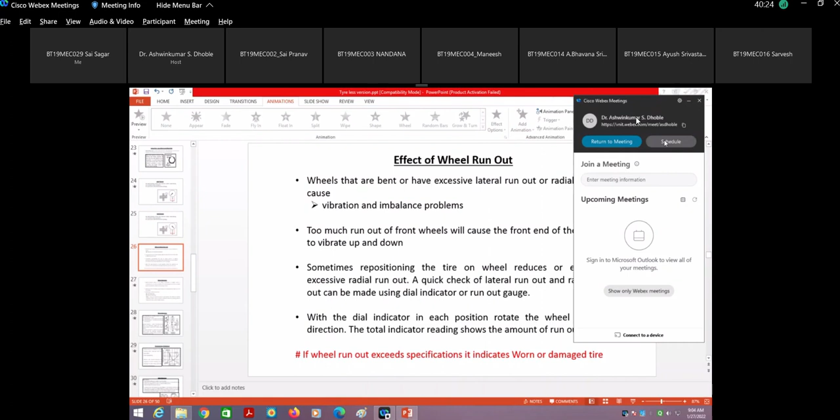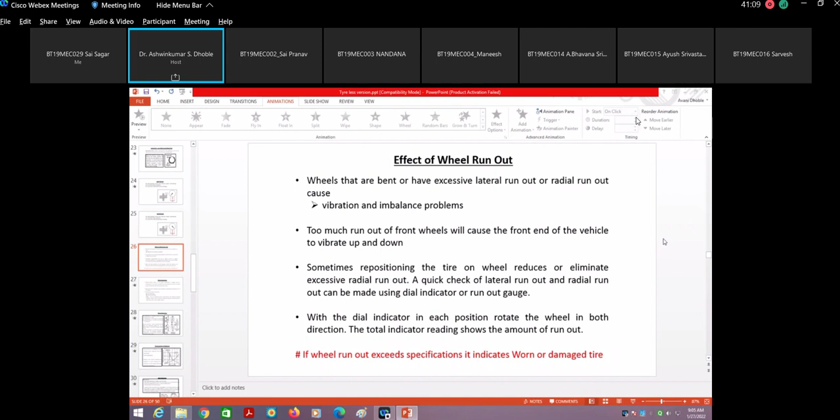So in the last class, we were discussing about the wheel runout. Are you able to hear me? Yes, let's move ahead. Now we have seen the radial runout and the axial runout. After this, we'll proceed further.

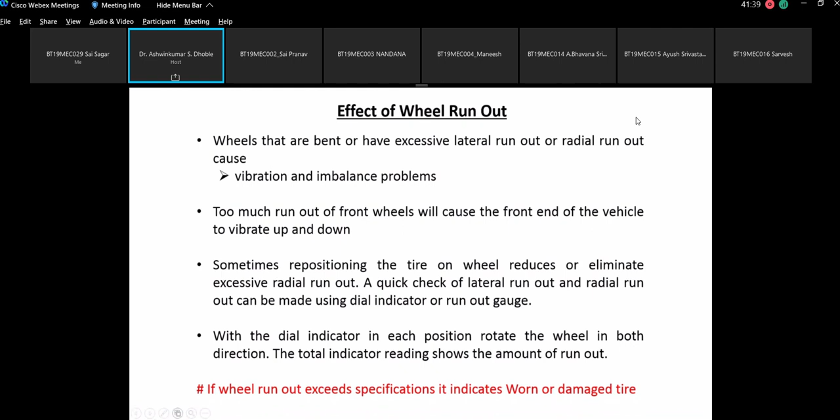Now here comes the wheel balancing. So what do you mean by wheel balancing? What will happen if you do not balance the wheel? Sir, what do you mean by wheel balancing?

Yes, sir, please answer if you can hear me. Have you studied the balancing, the dynamic balancing? Okay, dynamic force will come on the wheel axle. Sir, how will it come? Dynamic balancing of the wheel. Sir, what do you mean by balancing? Why are you saying the specific word dynamic balancing? Centrifugal force. So, centrifugal force is what?

Sir, what are the different types of balancing you have studied during your theory of machines class? Please answer, sir. What are the different types of balancing you have studied in the theory of machines class? Saurabh? Yes, sir, can you please answer? Yes, sir, we have studied about reciprocating, static, and dynamic balancing, sir.

Rushikesh Kolhade, why are you joining late? Rushikesh, please answer. You are joining the class late by 9 minutes.

Okay, read this: wheel balance refers to the proper distribution of weight around a revolving tire and wheel assembly. Poor wheel balance can have a marked impact on both the vehicle and passenger safety. Please note that it refers to the proper distribution of weight. That is basically, if the distribution of weight is not proper, then you will have a problem as far as the revolving of the tire assembly is concerned- proper distribution of weight. Poor wheel balance can have a marked impact on both vehicle and passenger safety, because there is a problem. If the wheel is not in balanced condition, then there will be some imbalance created, and if this imbalance is beyond the control of the driver, meaning he is not able to steer the vehicle, then there is going to be a problem as far as balancing is concerned.

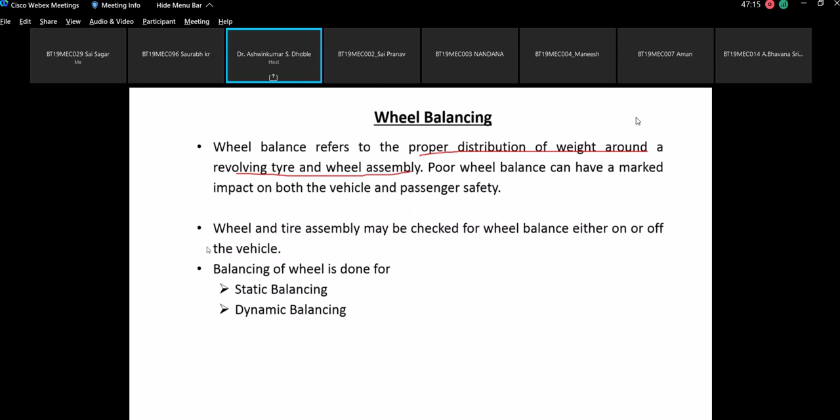So please understand this. Now, wheel and tire assembly may be checked for wheel balance, either on or off the vehicle. Balancing of wheel is done for static balancing and dynamic balancing.

So there are basically two types of balancing which have to be done for the vehicle. One is static balancing and the other is dynamic balancing. Let us see what we mean by static balancing and what we mean by dynamic balancing.

A tire and wheel may be in static balance and still have dynamic unbalance. So there is a marked difference between static balance and dynamic balancing. Either static or dynamic imbalance will cause the steering wheel to shake from side to side at higher speed.

That means if there is some imbalance on any of the wheels, then that impact gets transferred to the steering system, and there will be side to side movement of the steering wheel at higher speeds.

So you might have seen that if there is some wheel unbalance, or some problem with the wheel alignment, that causes problems with the steering of the vehicle. If the steering is not proper, there is directional instability, and once you disturb the directional stability of the vehicle, you know what is going to happen. So wheel balancing is a very important thing.

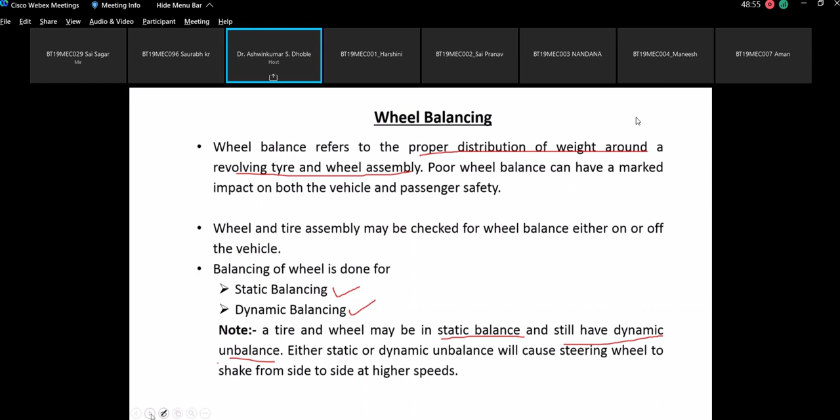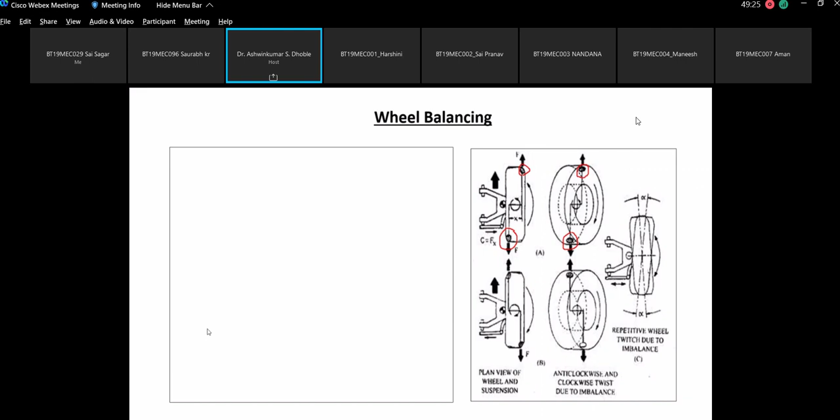So then this kind of movement occurs, a repetitive twitch due to imbalance. We are going to see what exactly this means. So sir, let us look at this now.

The balancing of rotating masses can be considered in two stages. One is static balance, that is, in one plane of revolution. Static balance is the technique of balancing the wheel in only one plane. But if you have unbalance in two planes...

In this particular sketch, if this is the center line, so this unbalanced mass is falling on one plane, and this one is falling on the other plane. If such kind of imbalance exists in the wheel, then it is going to create a couple.

This couple will be created as the wheel is rotated. Here the rotation is shown. Because of this, there will be a force acting through this mass in one plane and this mass in the other plane. So an unbalanced couple will be produced on the wheel, and the wheel will have side to side movement.

That is why it is termed the second stage, more than one plane of revolution. Then it is basically dynamic unbalance.

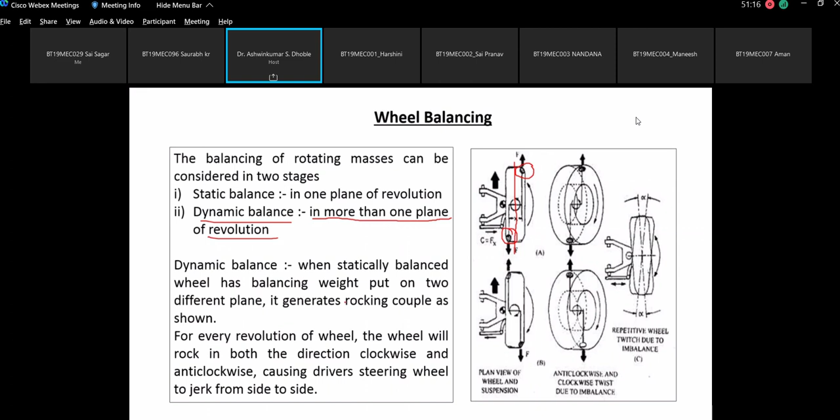Now, dynamic balance - when a statically balanced wheel has balancing weight put on two different planes, it generates a rocking couple as shown. For every revolution of a wheel, the wheel will rock in both directions, clockwise and anti-clockwise, causing the driver's steering wheel to jerk from side to side. So this is the effect of unbalance if it is there.

Now the characteristics of unbalance - here a graph is shown, wherein you will find that as you increase the wheel speed, the dynamic... this has to be static unbalance.

So dynamic unbalance will increase and then die out. But this is not correct - this is not dynamic unbalance. This is basically the unbalance caused by static unbalance. It will increase to some value and then die down because of the dynamic unbalance, whereas because of static unbalance, the amplitude of oscillation will go on increasing.

So this graph gives you the idea of what is going to happen with the increase in wheel speed - that means if the wheel RPM is increasing. So we'll see here what it says.

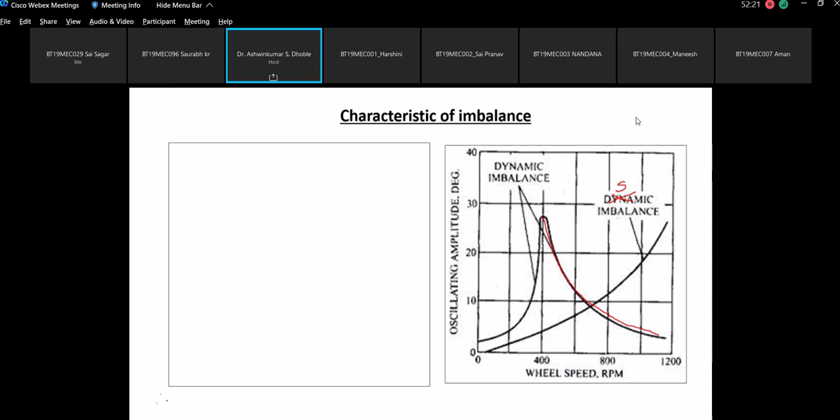Steady increase of amplitude, wheel twitching about swivel pin with a rising wheel speed. So please note that this is the steady increase. So that is due to static unbalancing. So you need to balance the wheel in the static condition.

That is one thing. Then, whereas with the dynamic unbalance, the magnitude of the wheel twitching rises to maximum and then declines with further increase in the wheel speed. That means this is going to rise up to a certain point and after that it is going to decrease. So this is the effect of the dynamic imbalance.

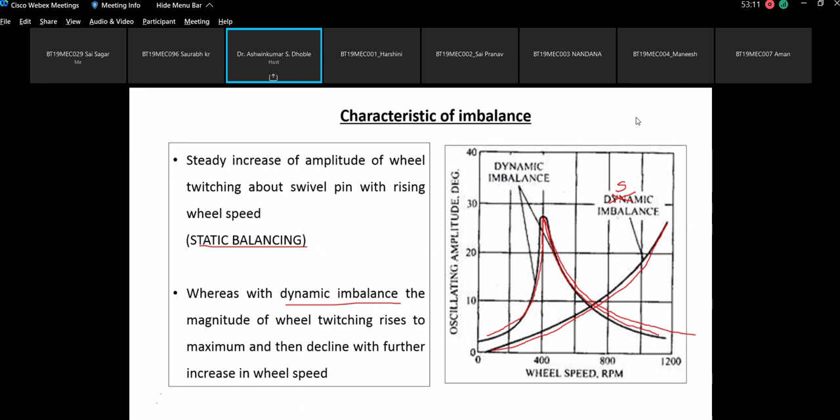But please note that if you have the static unbalance, then the oscillation amplitude is going to increase as you increase the wheel speed. So this is the effect. Okay. Now static unbalance. Exactly what is static unbalance? So static unbalance is, this is equal distribution of weight around the wheel.

That means you need to take out the wheel and put it on the floor, or you can say a pointer where you can have the wheel suspended at the center point, and then you try to add the balancing weight in such a way that the spirit level which you kept on the wheel should become perfect. The bubble should come perfectly at the center.

The wheel with static unbalance rotates with bouncing action or tramp wheel. Tramp is a hopping up and down of a wheel at higher speed. Okay, this will eventually cause uneven tire wear.

Okay, now what it says next is a wheel can be statically balanced by using a bubble or static balancer. So there is specific balancing equipment which is available with the tire selling dealer. So you can balance the tire there: remove the wheel from the vehicle and mount it on the bubble balancer.

As I have told you previously, there is a bubble balancer which is used for balancing of the wheel. If the wheel is heavier in one section, that is unbalanced, the bubble in the center of the balancer will move off center.

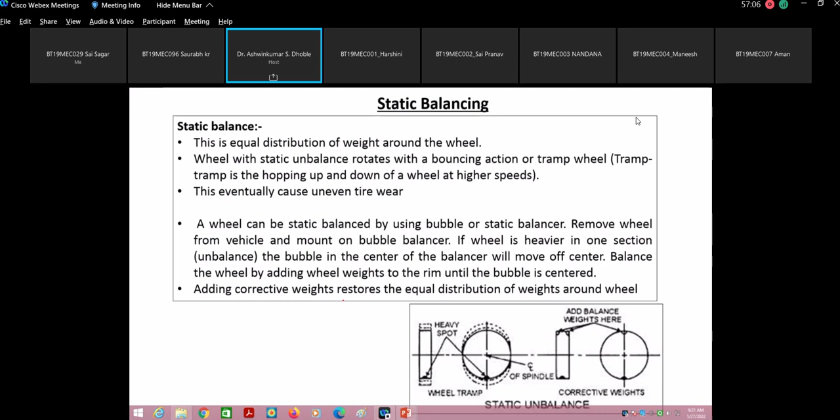So when you balance the wheel statically, the summation of the total force in static condition is equal to zero, but that doesn't guarantee it, because whenever you rotate the wheel there can be an imbalanced couple produced by putting the weight in two different planes. So even if the wheel is statically balanced, you have to do dynamic balancing. That is a must as far as balancing of the wheel is concerned. So have you understood static balancing? Is there any issue as far as static balancing is concerned?

Static balancing is balancing of centrifugal force in single plane. Somebody has quoted it previously, but I don't agree; it is not the balancing of the centrifugal force. See, centrifugal force will come into picture whenever there is a rotation of the wheel. If there is no rotation of the wheel, there will not be the presence of the centrifugal force. So please be careful when you select the word.

Okay, it is basically the equal distribution of weight about the point of, you can say, support. That is basically the static balancing. So please understand this very carefully. Okay, so just don't make any loose comment. Have you understood this? Do you have any issue as far as the static balancing of the wheel is concerned? Why you need to have the static balancing even if the wheel is dynamically balanced?

Because there is no guarantee that even if you dynamically balance, the wheel will be statically balanced, because it may not ensure the equal distribution of weight of the wheel around the point of rotation. Okay, so please understand that you have to have the wheel statically balanced, and you have to have the wheel dynamically balanced. Any one of the balancing is not sufficient as far as the vehicle wheel is concerned. Okay.

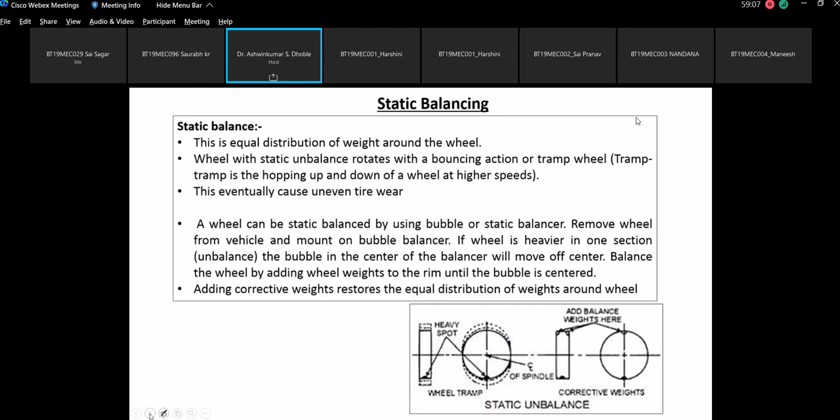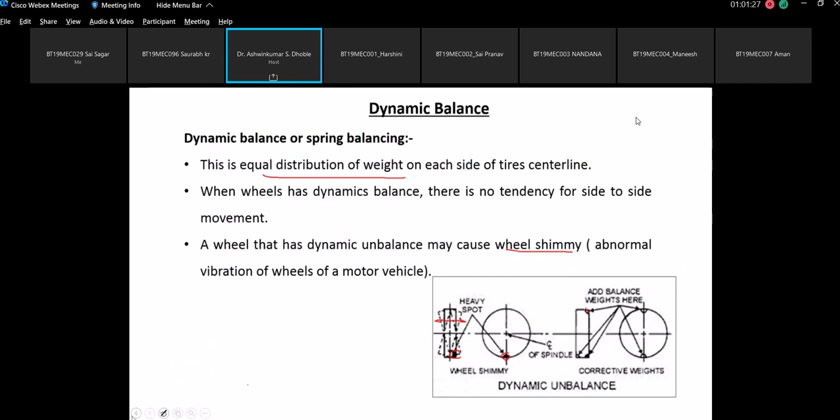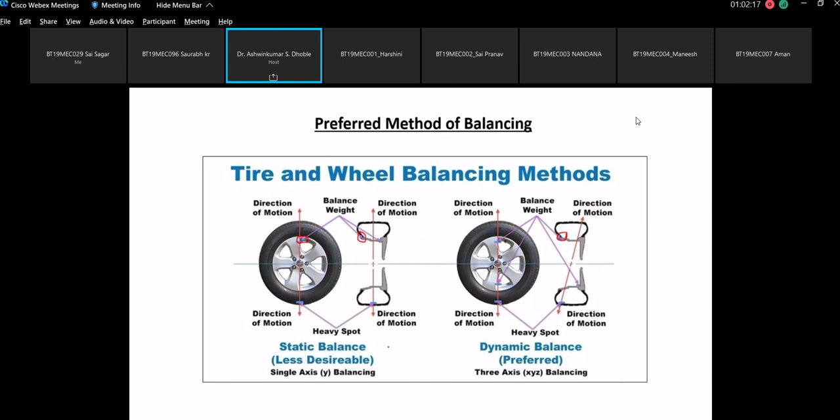Dynamic balance preferred: 3-axis XYZ balancing. This is single axis, that means you balance it in only one plane. So rather than looking at this, we will see the questions. The amount of unbalanced mass: more the unbalanced mass, more will be the wheel imbalance. That is the first thing. Second, distance of unbalanced mass from the center: more the distance, more will be wheel imbalance. This is very natural because it is m r omega square, so the value of the centrifugal force will be maximum.

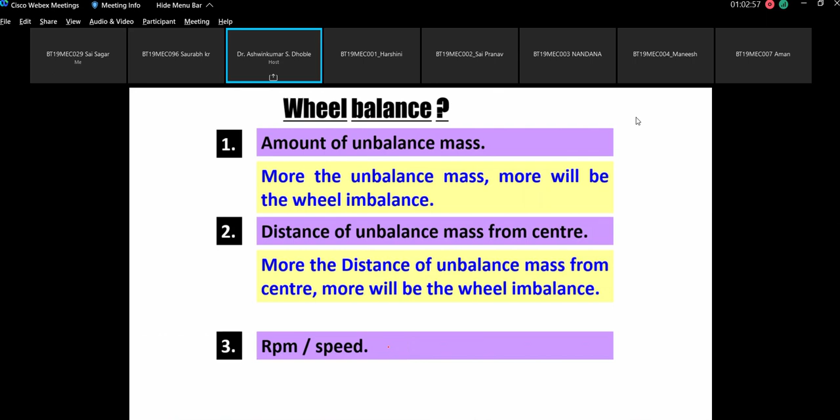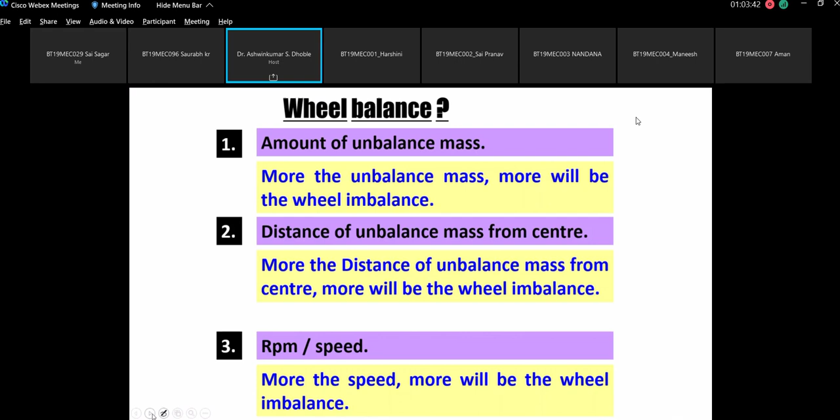Then the third one is the RPM or speed. More the speed, more will be the wheel unbalance. So these are the three things. First, if the amount of unbalanced mass is more, wheel unbalance will be more. If the distance of the unbalanced mass from the center of rotation is more, it is going to give more imbalance because it is m r omega square. If speed is more, omega is more, so the unbalance is going to increase as a square. So be careful whenever you have to balance the wheel. Have you seen by any chance how the balancing is done?

The first sign that the wheels may be out of balance is when the steering wheel starts to wobble. Wobble is the motion of the steering wheel moving up and down in an oscillatory fashion above a certain speed. So if you are driving the vehicle and you feel such a thing, understand that there might be some problem with the wheel balancing. Because of the vibration of the steering wheel, the driver will get fatigued very early compared to driving a balanced vehicle.

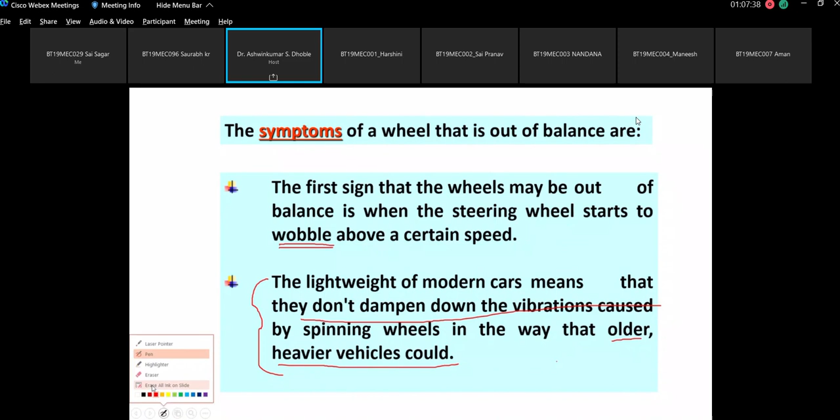The frequency of vibration omega equals the square root of k by m, where k is stiffness and m is the mass. If mass is less, omega will be more, the frequency of vibration will be more, and the fatigue will be more, because all these vibrations are transferred to the driver through the steering wheel. So please note that in lightweight vehicles the damping is not as much as in heavy vehicles.

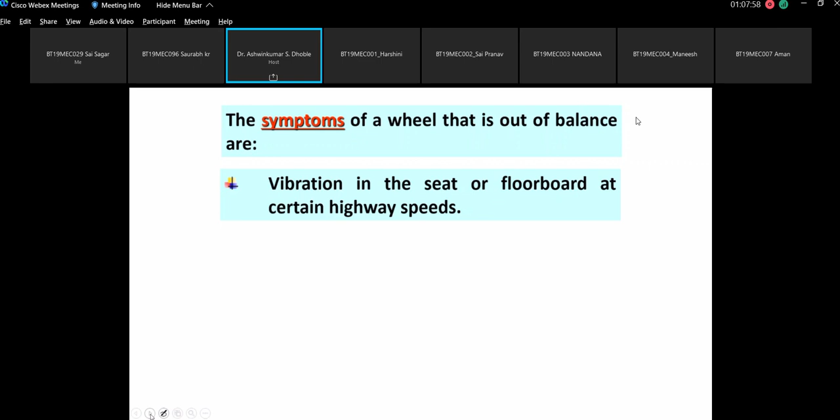There are other symptoms of a wheel that is out of balance as well. One, vibration in the seat or the floorboard at certain highway speeds, so passengers in a vehicle with unbalance may feel the vibrations. Scalloped or cupped wear pattern of the tire, which we are going to see in a few minutes, so we'll discuss it there. Then premature wearing of the suspension, steering components and rotating parts.

So one imbalance can create so many problems in the vehicle, and please note that these problems are gradual, and at some point of time they may crop up, and you may have a sudden failure of the vehicle, a sudden failure of the suspension system.

So if you are sensitive, a person who has good observation ability, then he can notice it if he is getting a seat in any vehicle. So please understand that after learning all these things, whenever you hire a taxi, there will be fear in your mind that there are so many problems with a taxi you hire from the online site.

So you will have some kind of fear in your mind: कि भाई इसका steering तो ठीक है ना, इसका wheel तो ठीक है ना, कभी sudden failure तो नहीं हो सकता, because there are some cases where there is a sudden failure of the steering linkage or steering universal joint, and as a result the driver has lost control of the vehicle.

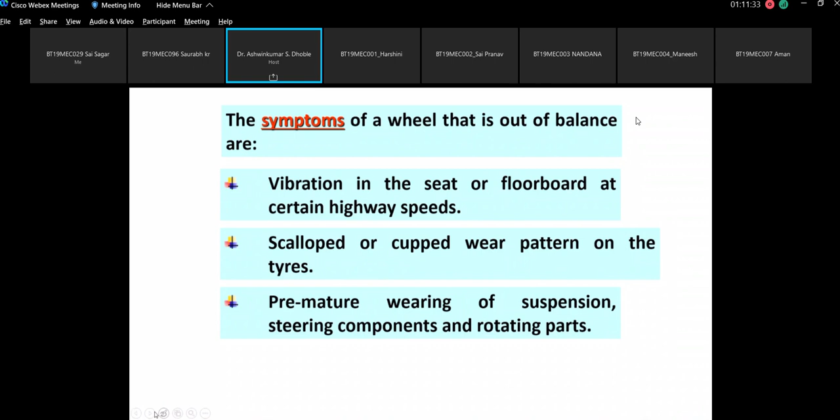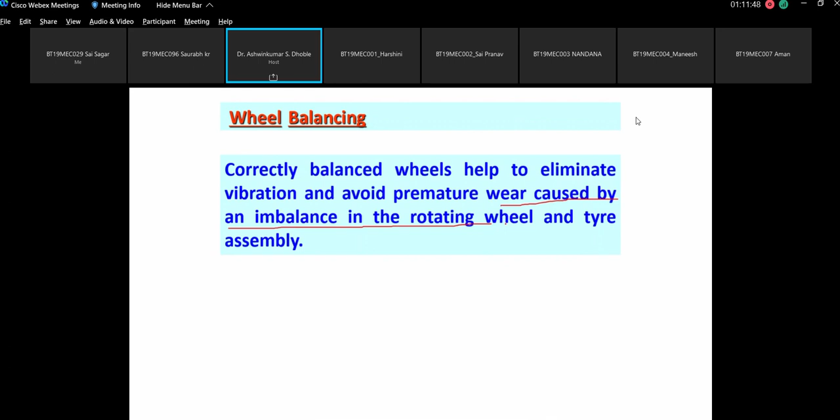केयरफुल रहो. Okay, now wheel balancing. Correct balance will help to eliminate vibration and avoid premature wear caused by an imbalance in the rotating wheel and tire assembly. This we have seen. Now wheels are balanced on a wheel balancing machine.

The machine rotates the tire and wheel assembly and automatically calculates the weight and location of the balance counterweight. आपको कुछ भी नहीं करना है बैलेंसिंग में, it is done automatically because it is fitted with sensors. You just have to take out the wheel, put it on the wheel balancing machine, and it will rotate the wheel at different speeds and give you the calculation automatically. The program will automatically calculate the location and the fitment of the balance weight.

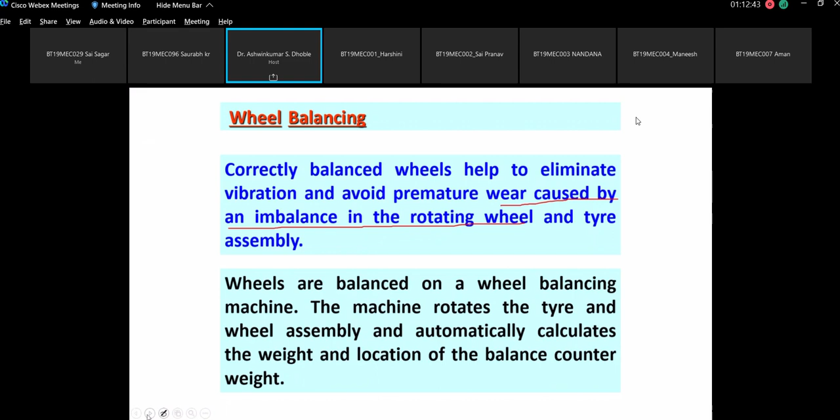Okay, wheels are balanced using small weights called balance weights that smooth out weight distribution and stop the vibration. Please note that 1 gram of balance weight will cost you around 1 rupee. Okay, so if you require a balancing weight of 50 grams, then the cost will be 50 rupees. That is the cost of the balancing weight. It comes in the form of metal tubes, metal capsules.

Okay, so next time whenever you see any vehicle, try to find out if there are some metal tablets which are attached to the wheel rim, then only you will come to know where it is fitted. I will show you the photograph as well, don't worry.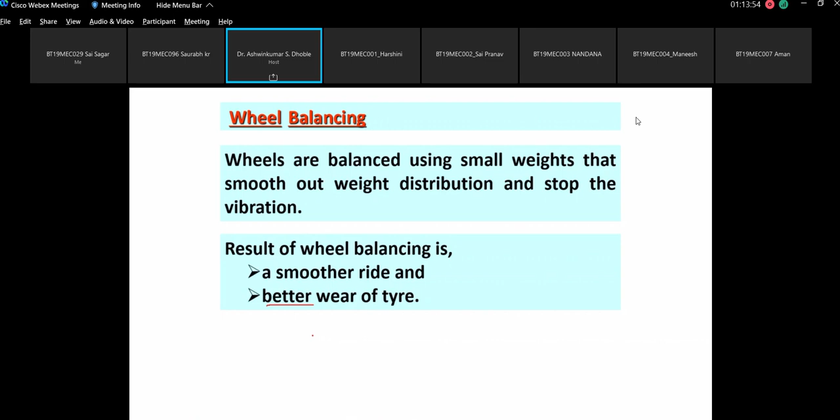Now, the result of balancing is a smoother ride and better tire wear. Better tire wear means the tire wear will not be uneven, or you can say random. The tire wear will be uniform and it will be a natural wear, occurring due to the road surface and the tire surface, but there will not be different types of wear pattern. Okay, so this is the importance of balancing.

Now, a driver may not always sense imbalance at the steering wheel. It could be present but dampened by vehicle weight. This is why balancing is equally important for both front and rear wheels. So this is the key statement.

That's why I was telling you from the start, if you are a sensitive driver, then and then only you will be in a position to feel and understand if there is imbalance of the wheel. If you are not, then sometimes the vibrations may not reach you, but there may be some imbalance prevailing in the vehicle tire. So it is important for both front and rear wheels to get them balanced.

So whenever you do the tire rotation, the person in the workshop will always try to see that all the wheels are balanced, and if some balancing weight is required due to wear and tear of the tire, he will correct it by putting the appropriate balancing weight on the tire. Okay, it's not that once you balance the wheel it will never become unbalanced. There are chances that the wheel may become unbalanced if you run the vehicle for certain kilometers.

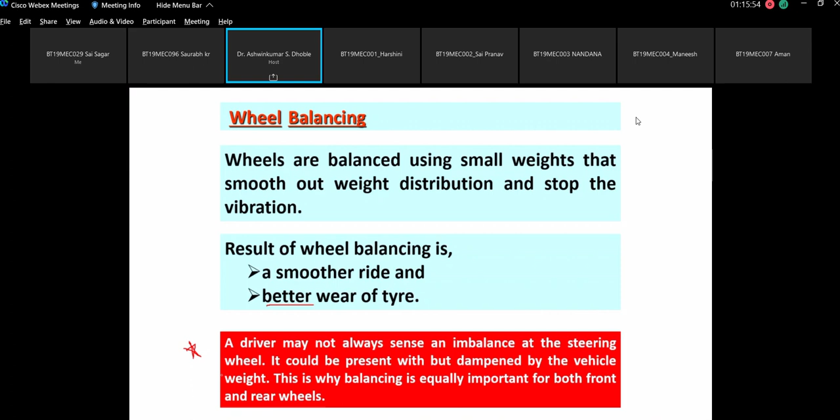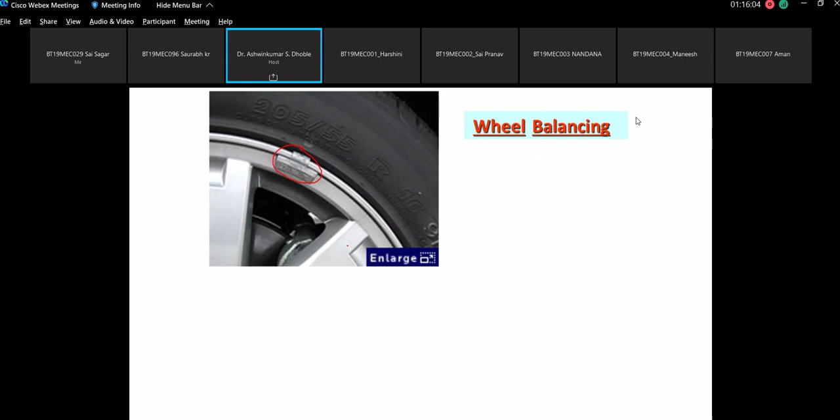Okay. Now we will see the tire wear. What are the different types of tire wear? Before that, I have a question to ask you, and let us see your perception. So please listen to the question carefully. During the summer days, the temperature in a city like Nagpur goes to 47 to 48 degrees maximum. Would you recommend that the tire inflation pressure should be less?

That is one thing. And second, during the winter, when the temperature goes down, do you recommend inflating the tire more than the specified pressure? So what is your answer for summer days? Like during summer days, the oil companies say please do not fill the tank till the last point; leave some space for the fuel vapors to accumulate. On similar lines, what is your opinion: during summer days, will you decrease the tire inflation pressure?

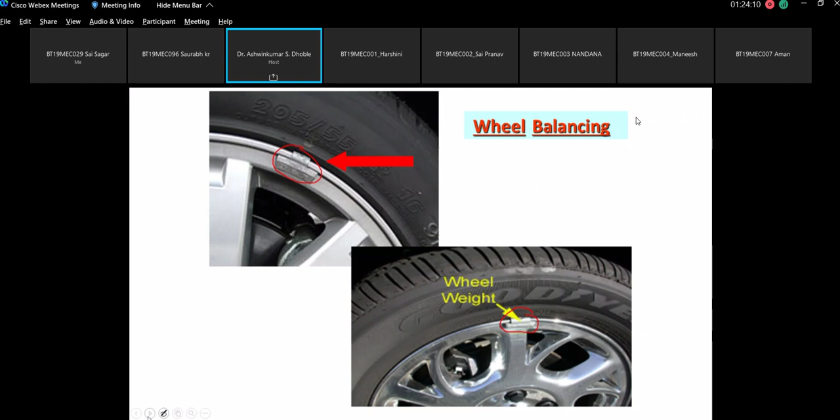The only thing they recommend is that during hot weather, please do not try to fill up the tank to the extreme end of the fuel tank. Even if you feel nothing will happen, there is a vent provided to the petrol tank lid, through which fuel vapor will escape. They do this because they want to save the evaporation of the vapors. So sir, don't do this kind of thing.

Now let us discuss tire wear. Now it is going to show you the tire wear pattern as far as overinflated tire is concerned.

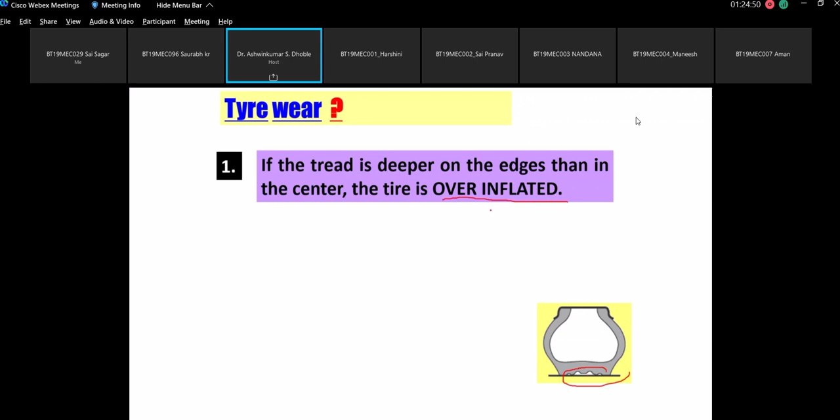If the tire tread is deeper on the edges than in the center, the tire is overinflated. That means if you see the tire where such kind of pattern is there, deeper at the edges compared to the center, then it is the sign of an overinflated tire. Deeper means the tread wear here is more deep compared to the tread wear here, so this shows that it is an overinflated tire.

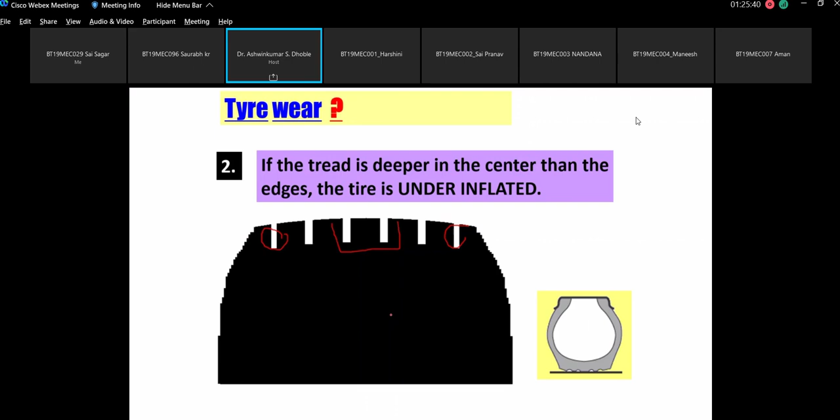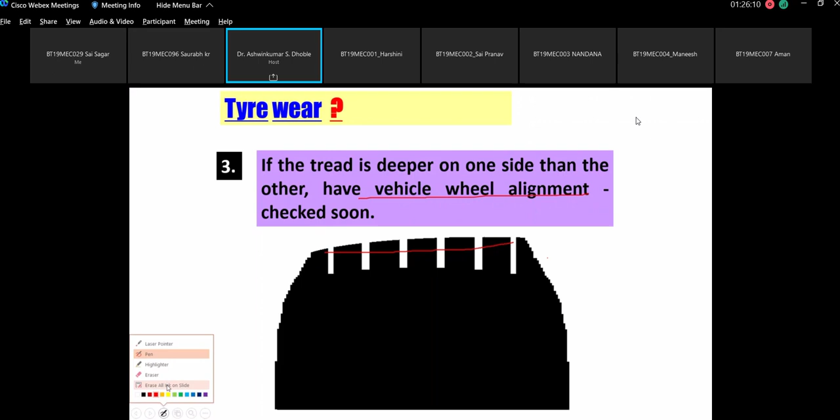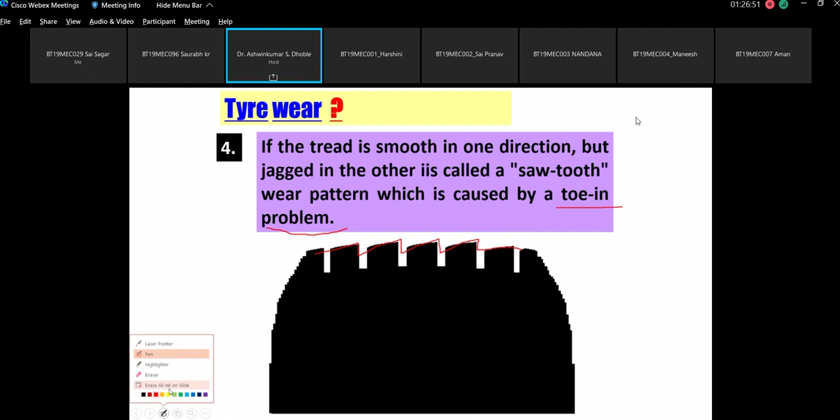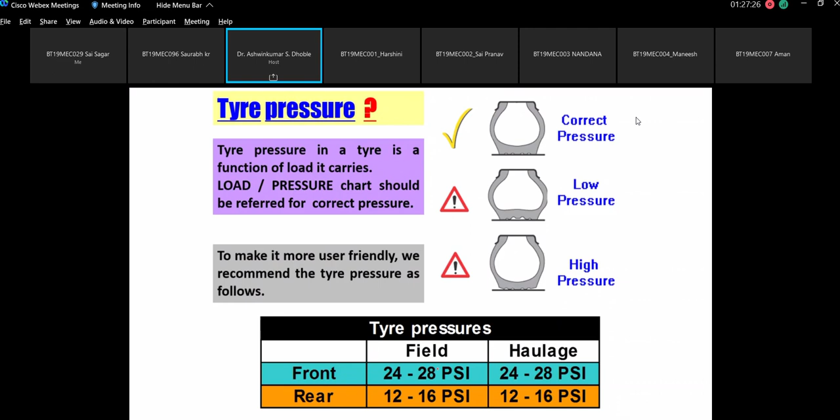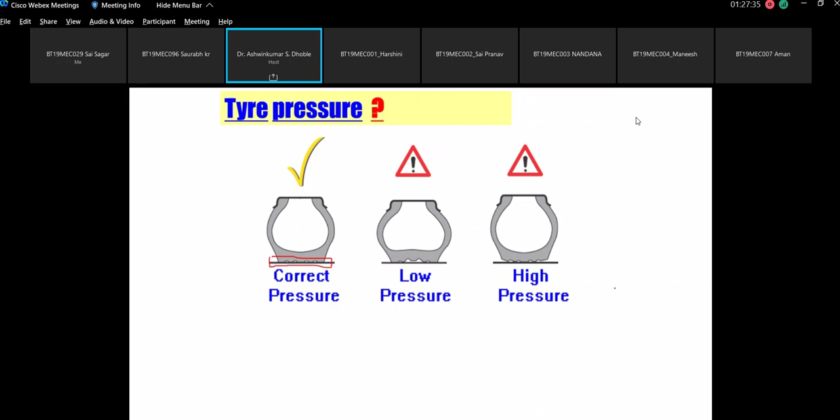So the correct pressure will have such kind of profile, that means it will touch the road properly, then there's low pressure and high pressure profile. These are basically the tire inflation values.

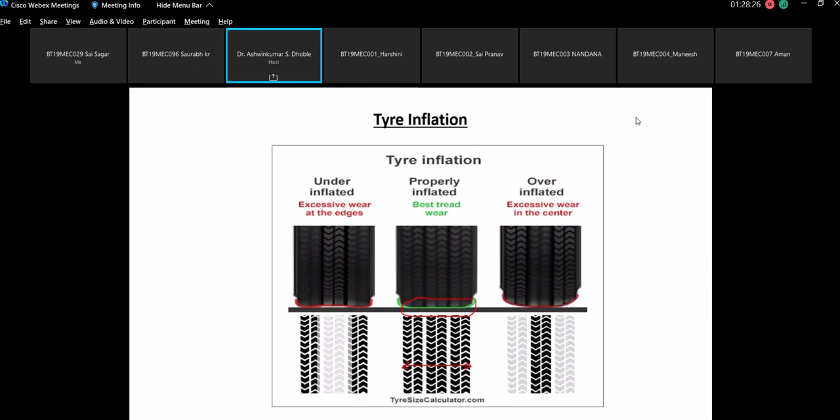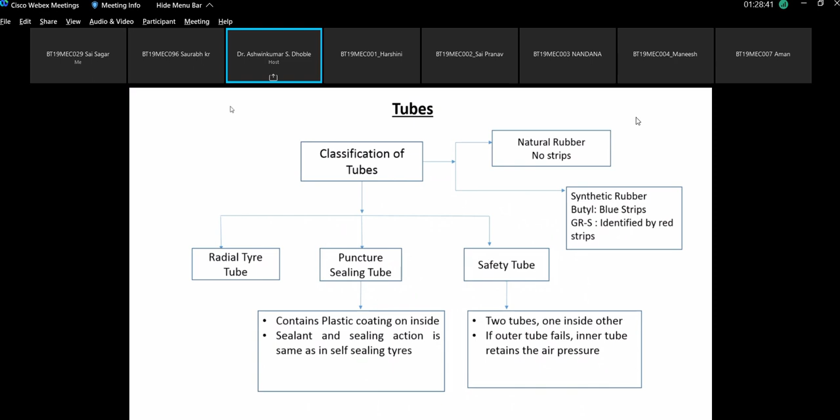Now today we will stop with this. If you have any query, you can ask me. If you do not have any query, then I have an announcement to make.